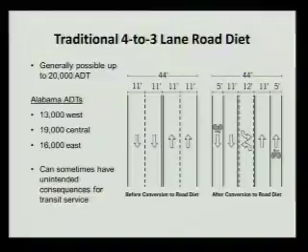But we also look at traffic volumes. There are some general rules of thumb, but also some really complex factors you have to look at to figure out if a road diet will work. We did quite a bit of analysis—we had consultants hired from Seattle to do that analysis. They worked with our Whatcom Council of Governments and the regional travel demand model to look at how that would work. On the west end of Alabama you've got 13,000 per day, 19,000 in another section, and on the east end about 16,000.

And again, I can't emphasize enough how important the transit component is on Alabama. When we look at doing this, we also have to look at what consequences there might be to our transit agency in terms of maintaining on-time bus service.

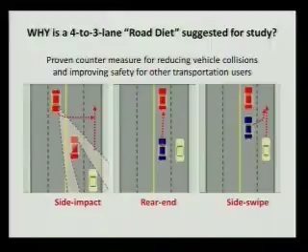The reason we would want to do a road diet on a corridor like this is because it's a proven countermeasure, specifically looking at eliminating 3 distinct collision types we clearly experience on the Alabama corridor: people turning across traffic making left turns, rear-end collisions where people either don't know there's a car stopped in front of them or aren't using their signal, or both, and side-swipes where a car tries to avoid that stopped car and swerves into somebody else.

All 3 of these are happening out on the corridor. The collision graphic that I showed you and all the numbers we're talking about tonight represent 3 to 6 years. So in addition to solving that problem that's already occurred, we want to make sure we prevent that from happening during 6 years and into the future.

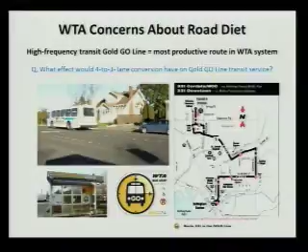With WTA, it is our most productive transit route, and we have an unofficial policy or agreement with WTA that we do whatever we can to work with our transit agency to maintain on-time service for bus routes, because if we don't, people will see transit as not a viable alternative. It's not as convenient - you can't count on the bus. We want to make sure we support our transit system as much as we make our roads work as well.

So now we get into some slides looking at what the road diet analysis revealed to us. These are pretty high level, but they really do paint a picture of what we found. Here's what the existing conditions look like, and the red bars on this slide represent vehicle queuing, meaning backups from the intersections. So this is what it looks like today, essentially.

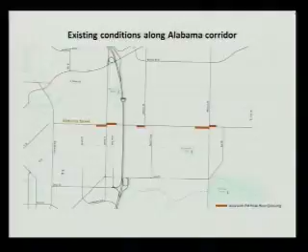This is what would happen if we tried to do a comprehensive road diet from Cornwall all the way down to St. Clair, the other end of the project. It backs the traffic up very significantly, and key to that, of course, is what is the impact as traffic backs up into other intersections, and what's the negative impact to the transit system.

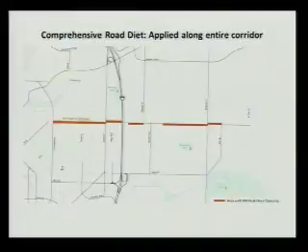Here's what it looks like with the modified road diet, which is just between the traffic signals, and again you see a lot of backups and vehicle queuing, and again negative impacts to the transit system.

Although if we go to the hybrid road diet, which is what we're calling the application of a road diet on just the west end and on the east end in a little bit different configuration, it looks very similar to the existing conditions. We could get into the details of that, but I'm not going to talk about that right now. Ultimately, what we ended up with was a recommendation for the hybrid road diet on the west end and the east end.

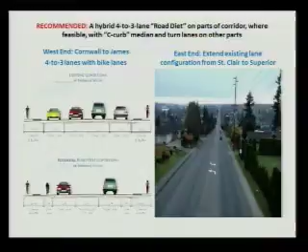On the west end, it would be the classic or traditional 4 down to 3 lane road diet with the addition of bike lanes. There's lower traffic volumes and less transit down there.

But on the east end, what we'd be doing is essentially just carrying the existing configuration on the Alabama Hill, which you can see in the picture on the right-hand side of this slide, where we already have a 2-way left turn lane. We've got 2 eastbound lanes going up the hill and 1 westbound lane going down the hill.

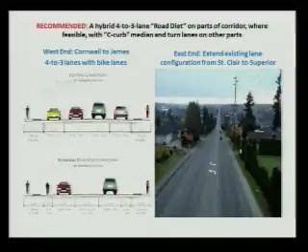Our proposal then is, it ends at St. Clair at the bottom of the hill, our proposal is just to carry that forward another 3 or 4 blocks to Superior Street so that we get the benefit of the 2-way left turn lane in the center without the negative impacts associated with taking the entire road down to 3 lanes.

So all of the alternatives moving forward from this recommendation are built on the hybrid road diet recommendation, and we'll walk through each one of these. The next 3 are kind of lumped together, though.

We talk about multimodal transportation, and what we're trying to do with Alabama, in addition to reducing vehicle collisions, we heard loud and clear in the pedestrian master planning process in 2011 that Alabama was a big problem for a lot of different reasons. People can't get across the street if they live on one side of the neighborhood. Transit riders can't get across to the bus stops they need to get to. And then there's not many good bike connections or bike crossings.

So the recommendation from the pedestrian master plan is, in fact, to do a road diet feasibility study and implement safety improvements. That's how we got here.

These flashers work great, but when you go across 4 lanes of traffic, it still leaves some vulnerability. So we're looking at a different recommendation for the rest of the corridor, and that's something we call high-intensity activated crosswalks. The acronym in the industry is HAWK. We'll just call them HAWK signals for simplicity.

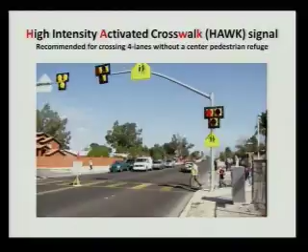We're recommending that 4 of these be installed on the corridor from Interstate 5 moving east: one at Moore Street, one at Undine Street, one at Michigan Street, and a new signal at St. Paul, which we'll talk about in just a second.

In the pedestrian master plan, this is the recommendation that was made for crossings. You can see one at Ellis Street, and there was one at St. Clair, but when we took a closer look in the bike master plan, we adjusted that down to Michigan since it was more centrally located. I also want to call your attention to other things called for in the pedestrian master plan, including recommendations for additional sidewalks on Texas and some of the other side streets. Those are on the priority list in the pedestrian master plan.

When we got into the bicycle planning, as mentioned, we made an adjustment to the St. Clair location. On the west end, we're trying to support the bike boulevards that go both parallel to Alabama and the ones that cross Alabama. So a new crossing is recommended at Ellis Street, picking up the existing flasher at St. Paul and moving it down to Ellis Street. Both Ellis and Grant would get center lane pedestrian refuges, so you can walk across one lane of traffic, stop halfway, look to make sure traffic's not coming, then proceed to the second. On a 3-lane section, great, but those flashers are not recommended for 4-lane sections. That's why we're moving to the different crossings.

On the east end, we're not talking about supporting bike lanes on Alabama. What we're looking at there is getting people across Alabama. That's why we have a recommendation for a crossing at Michigan Street. But we do feel the rechannelization can work quite well there, adding the benefit of a 2-way left turn lane and some turn pockets into the side streets. There's also less volume on the east end than there is on the west end.

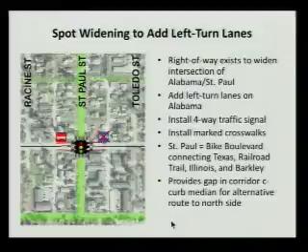One of the other things we're talking about is resurfacing the Alabama corridor. This is for safety purposes essentially, but Alabama has risen on the pavement ratings list and is ripe for arterial resurfacing, so there isn't a better time to do it than 2015. We'd like to take advantage of that and do the resurfacing at the same time we make all the physical improvements on the corridor.

Finally, one of the alternatives shown to the public in 2013 was considering an examination of the speed limit. That's yet to be determined, and the reason is that we feel additional study is needed, and that the actual effect of putting all these physical improvements in place will in fact reduce the speeds on the corridor.

We're adding 5 new signalized crossings to the corridor, making a grand total of 12 crossings. This will have the effect of making people start and stop, with an overall longer travel time. It won't always be the case, but a lot of these signals are randomly activated, so it's easy to see that with all these crossings in place, it won't be as easy for people to simply drive from point A to point B down the corridor.

And that's the conclusion of the presentation. I'll be happy to answer questions now or after the hearing. Any questions from council or staff at this time?